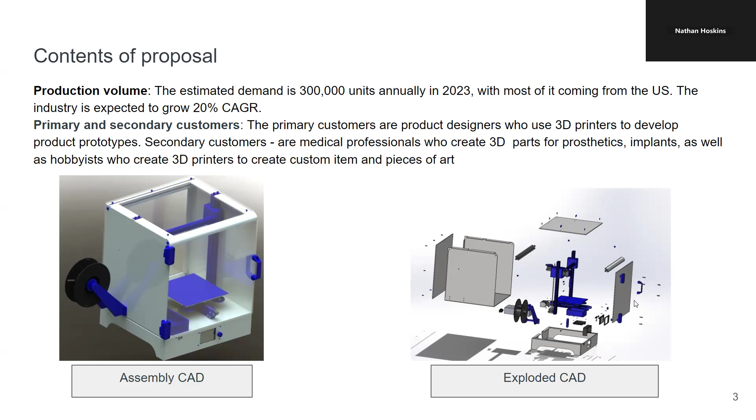This is our modularization. So initially, it only came with one spool. We decided we were going to modularize the second spool because basically the 3D printer is fairly modularized already. So we decided this is what we were going to do. Moving on.

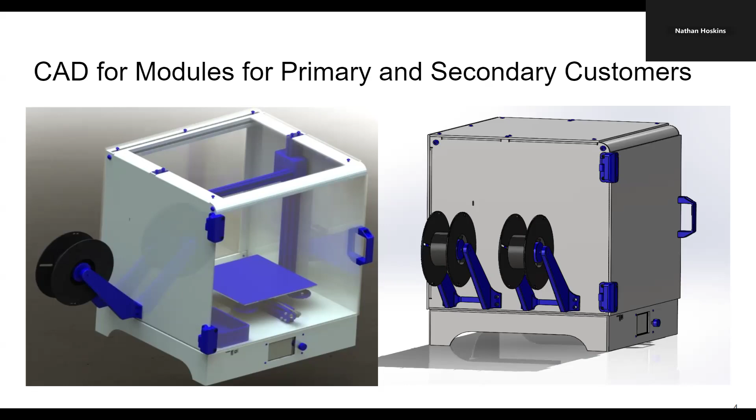Doing a deep dive into primary and secondary customers. The primary customers include engineers and product designers who rely on 3D printers for prototyping and custom component development. They require precision, flexibility with various filament materials, and reliability to create accurate parts. Additionally, medical professionals use 3D printers to produce custom prosthetics, medical devices, and anatomical models with a strong focus on precision and compatibility with medical-grade materials.

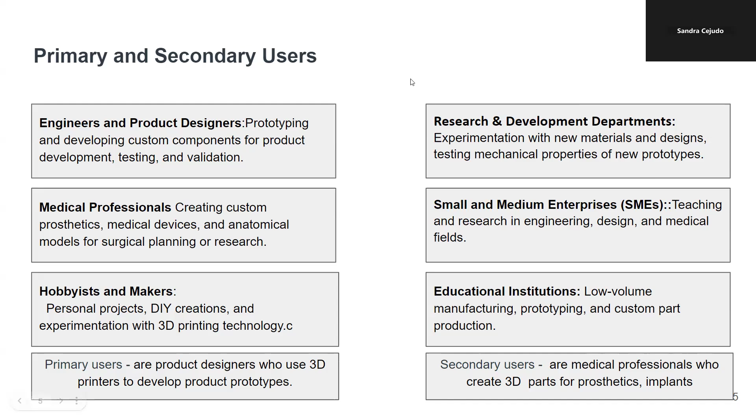As for secondary customers, there are educational institutions for teaching and research purposes, small and medium enterprises for low-volume manufacturing, and R&D departments that experiment with new designs and materials.

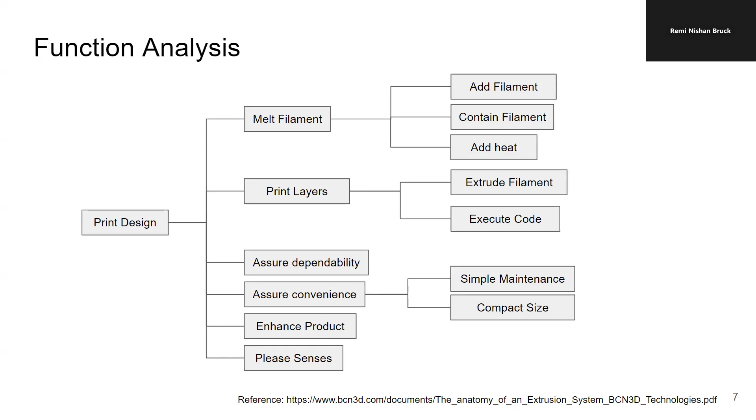Moving on to product analysis, we can go into the function analysis of the 3D printer. We have one main function branch, which is to print a design.

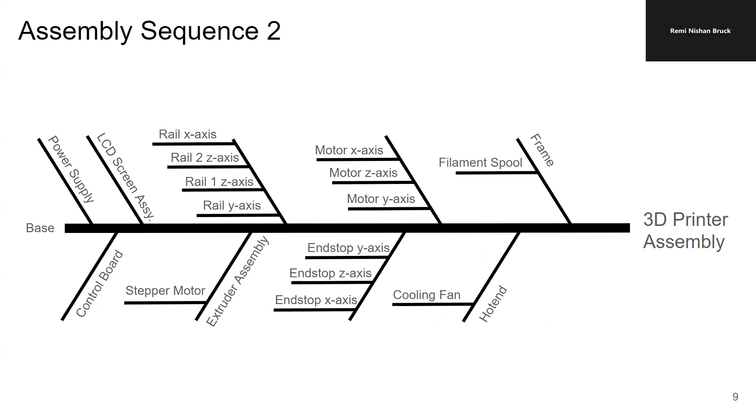Assembly sequence 2 involves putting the power supply, control board, and LCD screen in first as they're closer to the bottom of the assembly, then moving on to the extruder assembly, then the rail assembly and the end stop assembly, assembling the motors onto the rails, and then adding the cooling fan onto the hot end. And lastly, put the filament spool and frame assembly around the 3D printer.

Comparing the two assemblies, we found that sequence 2 was better due to the ease of transferring and handling, locating, and testing sub-assemblies.

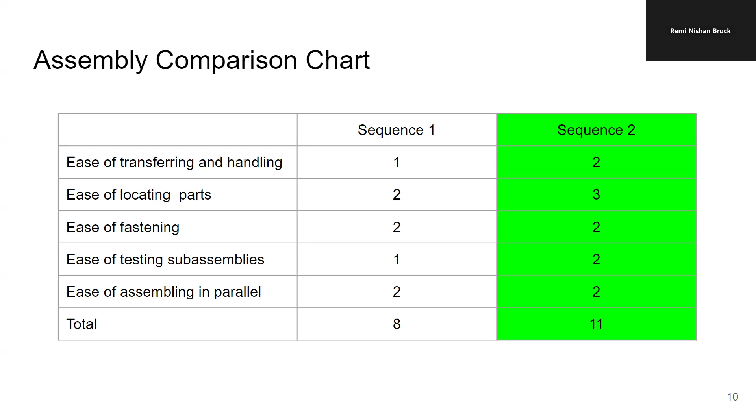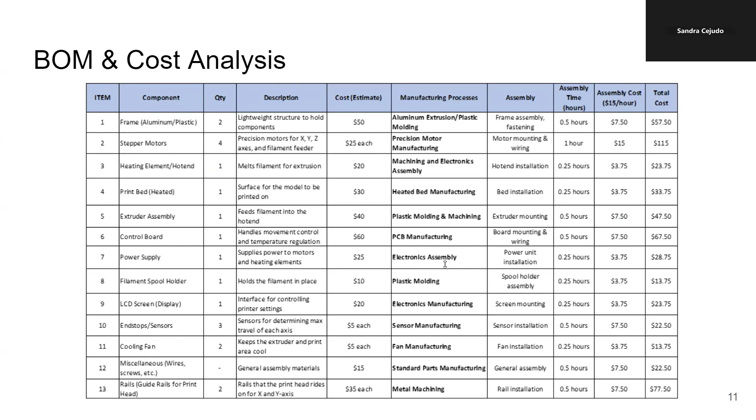We have calculated the cost of materials and manual assembly, assuming labor costs at 15 per hour. Key components such as the frame, stepper motors, heating element, print bed, extruder, and control board make up the bulk of the cost. Pre-purchased items are motors and sensors. Those are integrated into the assembly, but the electronic components will not be redesigned, allowing us to focus on improving mechanical components. The total cost is a combination of material expenses and manual assembly time.

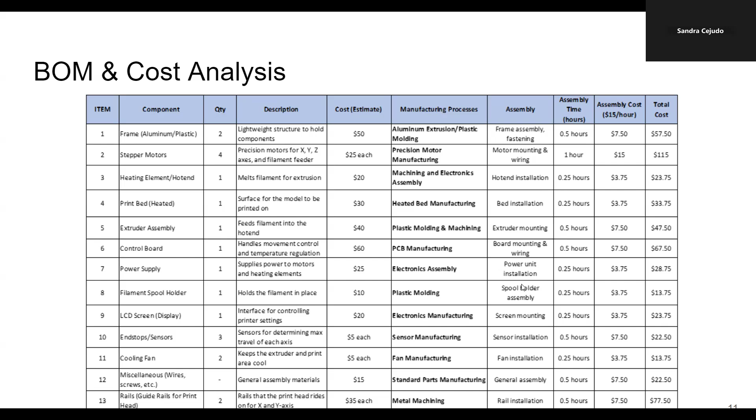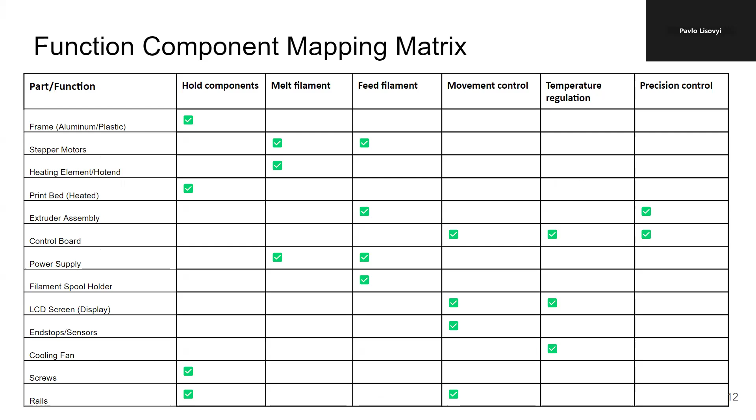Moving on to the function component mapping matrix, we have mapped the parts to their functional components for the final assembly, with temperature regulation and precision control being the modular functions. Next, please.

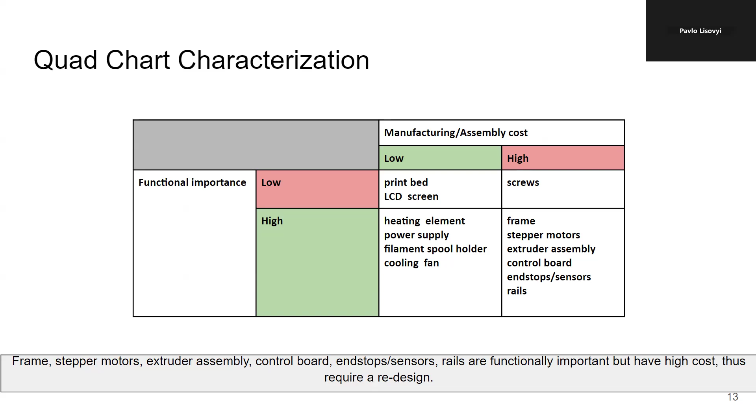We have also put the quad chart characterization in place and found that frames, stepper motors, extruder assembly, control board, end stops, and rails are functionally important but have high costs associated with them. Thus, they're the primary candidates for redesign. Next, please. Moving on to our product family design.

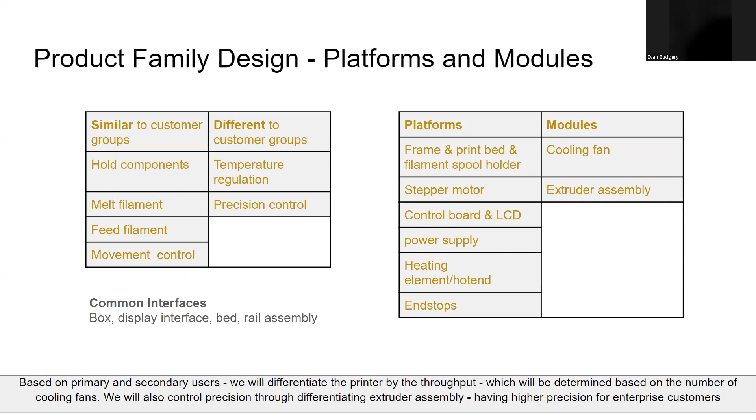The functions of our designs are very similar, but the designs between primary and secondary customers differ in terms of temperature regulation and precision control. Our design is able to modularize very easily, having modules for the cooling fan and extruder assembly, which makes it much easier to assemble the different designs within the family.

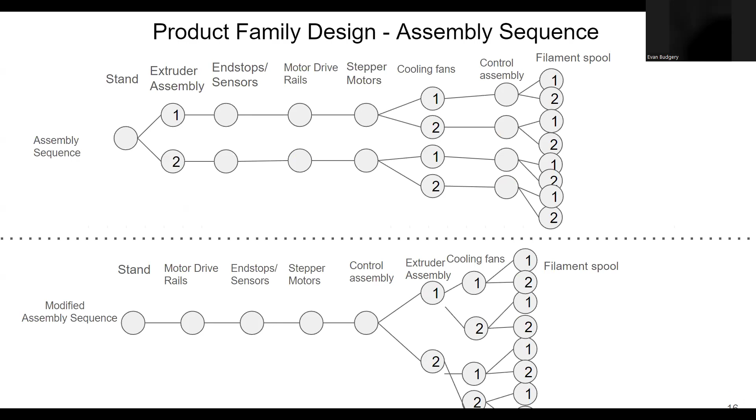In order to decrease the number of nodes, we can use the modularity of the printer to our advantage by adding the extruder, cooling fans, and filament spools at the end of the assembly sequence. We are able to simplify our process, keeping a standard printer until the addition of the primary and secondary variations.